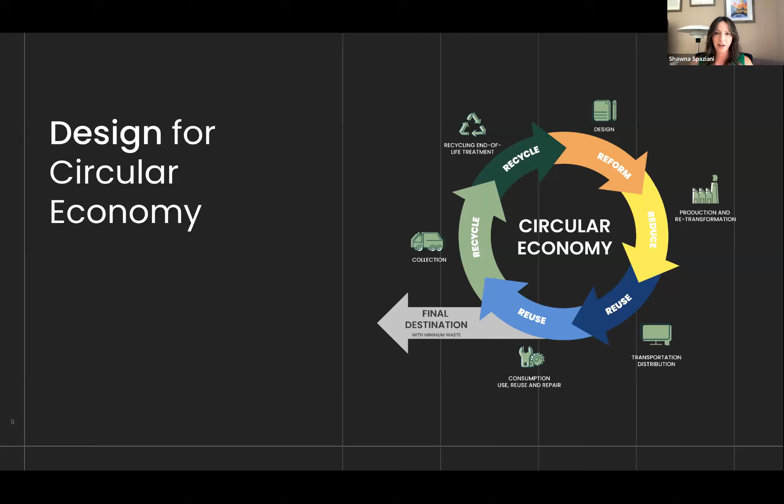So they ask that a product can be designed to be taken apart, all of its parts and pieces organized. Some of those will still go to a landfill, but the idea is that the other pieces that can be recycled are recycled, and they're melted down to raw material, repurchased by manufacturers, and then reused to build new products. And what does that mean?

So first of all, the big key there is, again, designing for disassembly. There are a couple of things that have to happen in design that traditionally don't happen for a lighting fixture. One, you can't use a lot of fasteners, screws, nuts, and bolts because they can get lost. They're hard to recycle. They're just hard to keep track of on a job site. And once you have to start unscrewing a lot of things, it's also a big barrier to entry to disassemble a product.

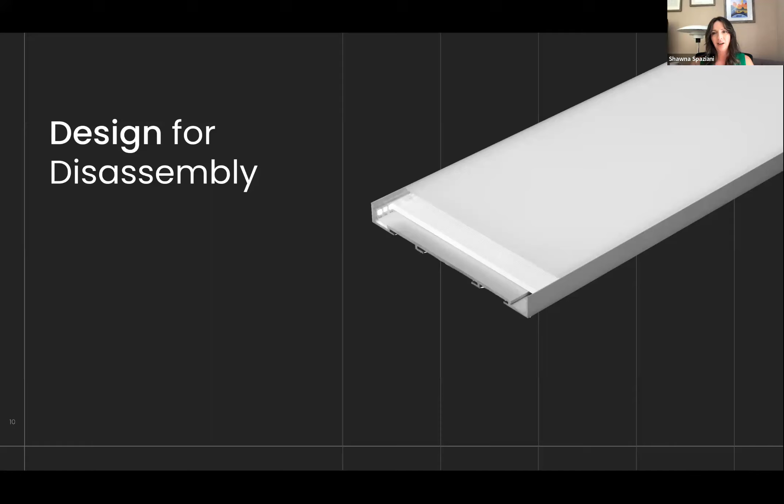The other key thing, though, is you can't use a lot of harmful adhesives either. A lot of glues can't be used, and other chemicals that would typically seal a fixture are now considered taboo. Another thing to look at with LEDs, and it kind of goes with where the trend of the products go anyway right now, is designing for dematerialization. It basically means editing your design down.

It's very easy to design a fixture that has all the bells and whistles that you need, from high lumen output to all the optics and precise optics that you want, with maybe rotatability, functionability, adjustability. Maybe it needs to be outdoor rated or needs some special NEMA enclosures. So when you start asking for all of these things, it's easy to build a product that's big and bulky and houses everything that you need. That's how lighting fixtures used to look about 10, 15 years ago for LEDs.

But what's very important when we're looking at the carbon footprint, sustainability, and also that circular life cycle is a product that uses the least material as possible, but is also still as powerful as design needs to intend it to be. So weight is very important. I'll show you a chart later in the presentation that shows exactly why this is so important as far as the carbon footprint of the products.

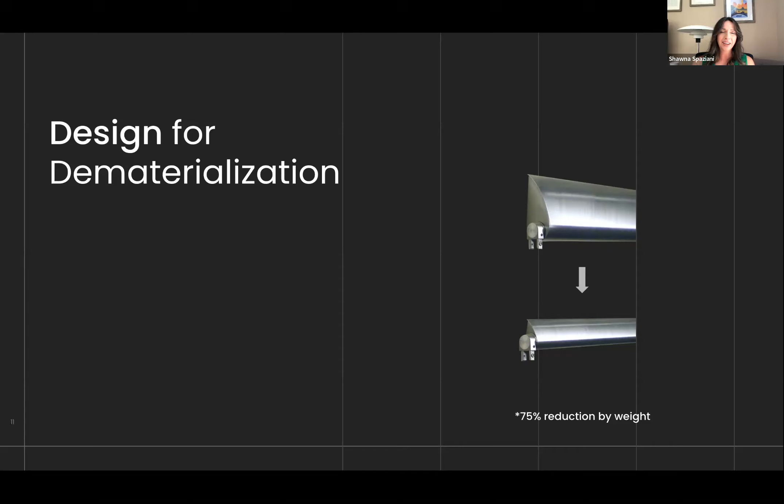But just for that circular life cycle and something that can be disassembled, taken apart, and recycled, using as few parts and pieces as possible and as small of a profile as possible is really key to that sustainability initiative. And it's very difficult. Editing design down is one of the hardest things that you can do, whether you're designing a lighting product, whether you're writing a novel, anything in between. Editing is extremely difficult to do.

And finally, designing for longevity. And what we mean here is, yes, we're using LEDs that last a long time, but one of the key things that I always get pushback on, and have since I started selling LEDs a long time ago, was that people didn't like the fact that an integral LED fixture was all-encompassing.

So if you have to maintain the fixture, if it breaks, or even at the end of its life cycle, what do I do? How do I replace the insides without having to replace all of the exterior of the fixture as well? And traditionally, the answer for a lot of integral LED fixtures is that you can't. If the fixture is not modular, if something goes wrong, you have to trash the entire thing and buy a new one, and it is so wasteful.

So there has to be a balance there when we're talking about designing for sustainability, where you have an integral LED fixture, but it's still designed in a modular way where certain aspects of the fixture can be replaced and a big percentage of the fixture can still stay there. So in an example like this, the mounting hardware might be something that could stay installed and only the lighting elements inside would be changed out, but you still would have to maintain warranty, extend the warranties so that the fixture can last longer and longer while just updating the technology inside.

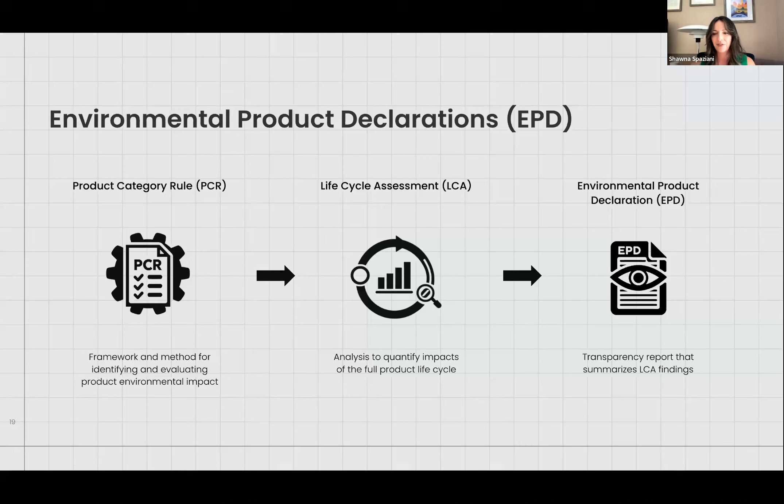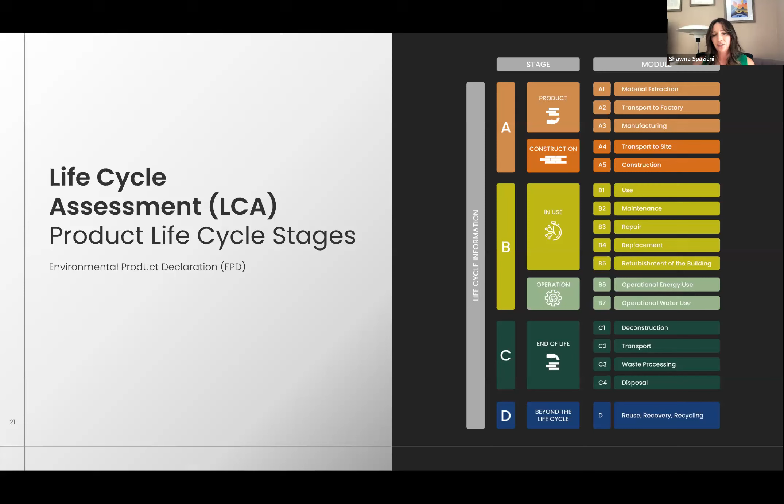So we're looking at the deconstruction, the taking apart of the product, transportation of those parts and pieces to different areas, whether it's to a landfill or back to a recycling facility, waste processing, disposal if necessary, but also in that dark blue, that's the important part. That's the reuse, recovery, and recycling of every part and piece that can be recycled so that it can go back into that full life cycle, go back into the manufacturing process, and manufacturers can then buy that raw material that's been recycled and use it again in their products. So again, the environmental product declaration, very, very thorough, looking at that life cycle.

What they've done in Europe is kind of combine something that's in between the Declare program that we're using right now a lot in the US and the environmental product declaration, which is that full extreme. So CIBSE is the Chartered Institute of Building Services Engineers. It's basically the European version of ASHRAE. They're located in the UK. They set the safety standards, but they also set a lot of the sustainability standards for all of Europe.

So the maintenance of the product, the operational use of it, and also what's key there is they are also not responsible for what happens to the material after it's being uninstalled from the site and deconstructed at the site. So they say you have to build a product that can be deconstructed and can be recycled and used as a recycled material. However, you're not responsible for actually making sure that that material is recycled. So it's not perfect, but it is a nice balance where they're measuring a lot of the parts of the life cycle of the product.

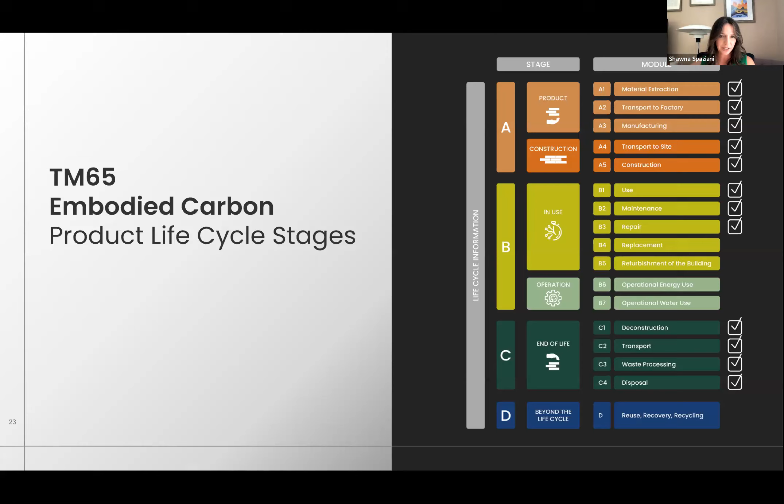They're asking manufacturers to note and be transparent about where they're getting their material, but they're not saying that you also have to be responsible for what happens to the material after it's deconstructed on the job site. So it's a nice balance between the two.

And this chart just kind of, again, compares the two, where you have the Declare label. Again, it's self-audited, but it has a very low barrier to entry. It's an easy way for manufacturers who have never really thought about sustainability or auditing their products to that extent to start the ball rolling on how do we create or measure carbon footprint of our products.

So it's easy, but again, right now that's self-audited. It is based on the honor system, so there's a lot of loopholes. When you're looking apples to apples, it's very hard to compare and trust that every manufacturer is being honest about how sustainable their products really are.

Again, the environmental product declaration is that other extreme where you definitely could trust what it says, but it has such a high barrier to entry. It'd be so expensive for manufacturers to do that we don't really see that as a realistic option in the United States either. Again, in TM65, what they've done in Europe is kind of a measure between the two.

It's kind of a balance where they're leaving still some key areas out of certification, but they are at least auditing it, and they're making it something that is a little bit more valid so that designers in Europe, when they're choosing products, can, just like they do with UL, choose, okay, I like this carbon footprint, I like this, I like this. Actually, in Europe, manufacturers now cannot be considered for bid on commercial products unless they have a TM65 rating on their spec sheet.

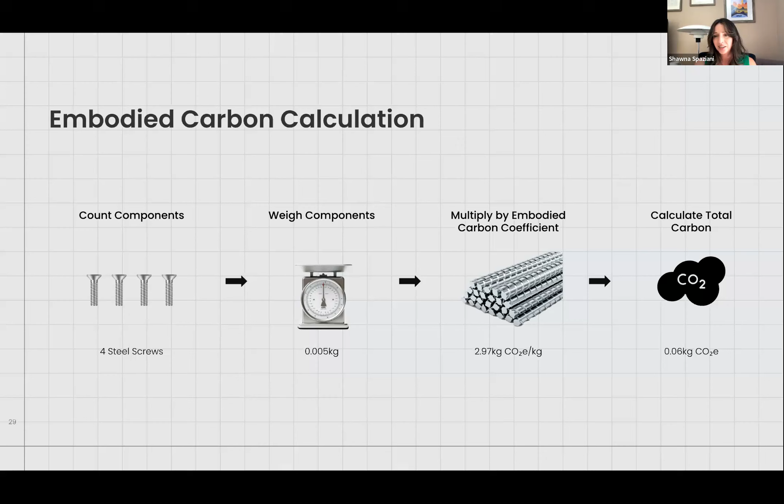To get the carbon footprint of those, you multiply them by a scientific standard called the embodied carbon coefficient. Basically, for steel, it's 2.97 kilograms per CO2 equivalent. And when you multiply that together, you get the carbon footprint of these 4 steel screws. In this case, it's 0.06 kilograms per CO2 equivalent.

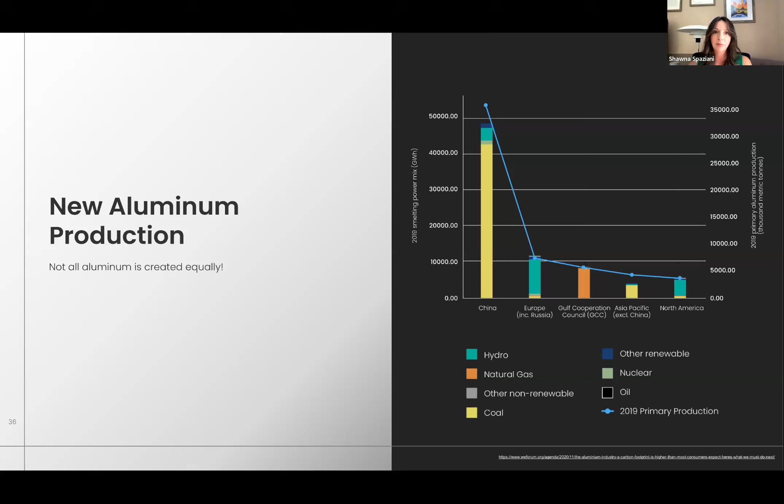So China makes a lot of new aluminum, but they also use a ton of power to do it using coal. In Europe and also in North America, mainly in Canada, we use hydroelectric power to create a lot of our aluminum, and the power mix on top of that is much less. Gulf Cooperation, that would be natural gas, and also other Asian countries use coal as well. So when we're looking at the power draw, the amount of energy required to produce aluminum, it is different depending on how it is produced. And so that is why where it's coming from, and the manufacturing standards of those countries, can be so incredibly important. But it's also important to note that just because something can be recycled doesn't mean that it is.

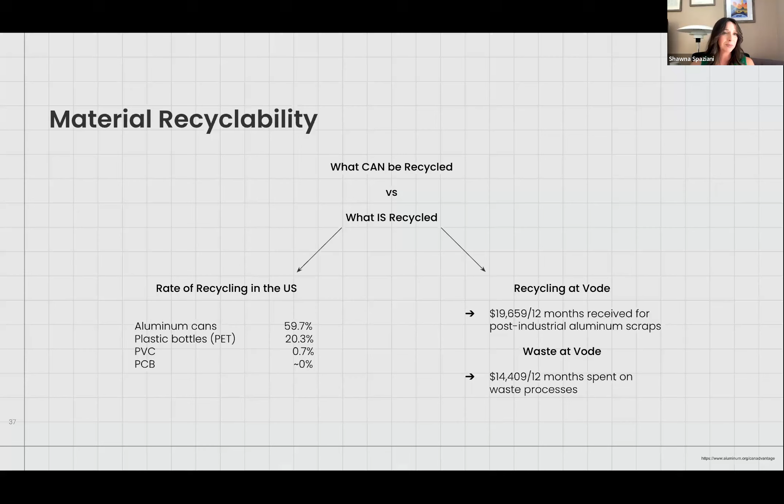So we keep talking about aluminum. Aluminum is used commonly in a lot of lighting fixtures, and it is ideal when we talk about sustainability because aluminum can be recycled infinitely over and over again. But even in the United States, only about 60% of aluminum cans are recycled to date. And when we look at other materials commonly used in lighting fixtures, like lenses, plastic bottles would equate to a fixture lens or some other plastic components, and only about 20% of those are recycled. When we look at PVC, PCB that are used in LED boards, that's almost zero. So it's still a large challenge as far as how do we get those recycled pieces to a recycling facility.

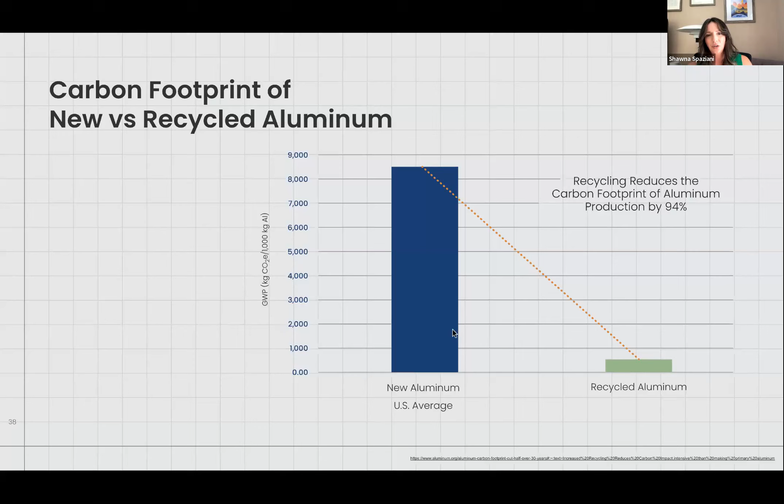But here's why it's so important. Switching from new aluminum production to recycled aluminum can reduce the carbon footprint of products by about 94%. So this graph is showing the aluminum that's made by the global warming potential. And that's, again, going back to that one rating that I showed you, the life cycle analysis. And the life cycle analysis will measure the global warming potential of a product. And just by changing the source of aluminum of a product, you can change the overall global warming potential or carbon footprint by 94%. So it is very important, again, to look at the source material as well.

And if you really care about it, if you're looking for manufacturing partners specifically for those eco-friendly projects, then also looking at where they source and how they build is so important. So in the United States, where are we going with all the sustainability? So first of all, energy consumption is always important to look at.

Fast forward about 9 years to 2012. This is when LEDs were out there, but they weren't necessarily being universally used everywhere like they are today. If a municipality or a city's energy was cheap, people were still using fluorescent fixtures. They didn't care about switching over to LEDs at that time. So it was still very mixed as far as what type of lighting sources you were finding in buildings.

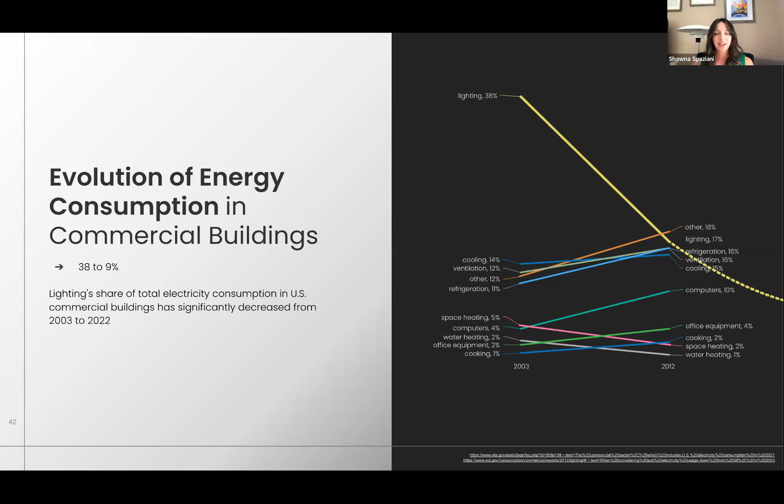But even with that slow adoption, we were able to reduce the overall energy usage of lighting from taking up 38% of a building's energy to only 9% of a building's energy. And that's just from switching light sources alone. We know that since then, that number has continued to decrease just as technology and controls have gotten a lot better.

And we see the lighting industry, as far as sustainability standards, very much the same way. In the early days of LEDs, there were a lot of standards that had to be developed so that it was going to be widely used. And we think sustainability is very much in that same early stage. There is something called, again, cradle to cradle. You saw the logo at the beginning of the presentation in all of those sustainability standards, and you might start seeing this a lot more on spec sheets as well.

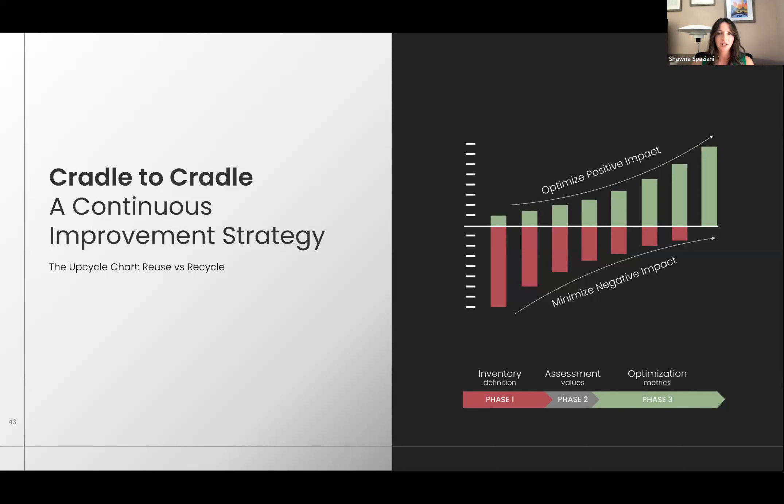But basically, again, it's looking at that full life cycle. It is an idea that any manufactured product should follow the same organic life cycle that nature does. But as a whole, it has us looking at the full life cycle of products. To do that, to go with the circular economy, you have to be very stringent about what happens to material at the end of a product's life cycle.

So once it's taken off of a site, who is going to be responsible for taking the product apart and sending the different parts and pieces to either a landfill or to recycling facilities? This is a big question that has not been answered yet, to be transparent, but one of the big answers is we'll send it back to the manufacturer who made it and let them do it. That's called a take-back program, and it's a logical answer. It's not necessarily the perfect answer, though. That's why I say there is no perfect answer to this at this point in time.

The big benefit to the take-back program is that you have an answer to whose responsibility this is, and who can make sure the product is disassembled and those recyclable components are recycled. A couple of drawbacks to it are that you now have to take into account the transportation of that material back to the factory when you're looking at the carbon footprint. So it's one more step in the process that can add to the carbon footprint of the product.

You also have to account for current laws and standards; in a lot of states right now, take-back programs for manufacturers are illegal. So a manufacturer is not allowed to accept their old products back, disassemble the parts and pieces, and send those out to recycling facilities, for profit reasons and other reasons. It's considered a conflict of interest right now in a lot of states. I won't go into detail about which states are which, but a lot of those states are where a lot of manufacturers are right now. So it's a mixed bag whether this can work in the current economy.